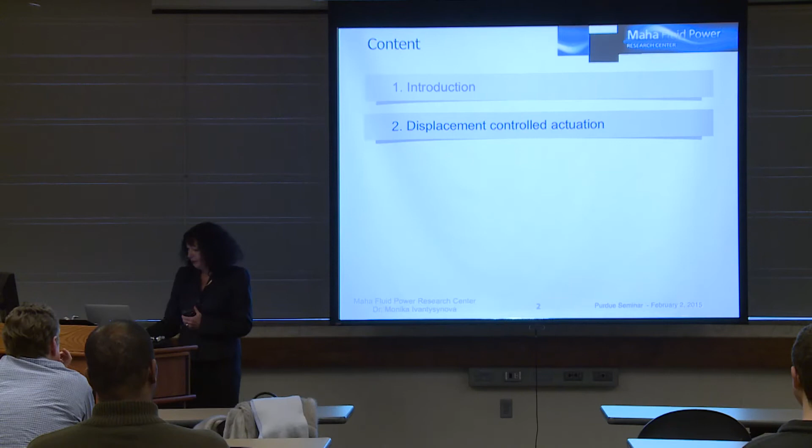I entitled this presentation 'From Gutenberg to Cloud Printing and From Bramah to Question Mark.' I will use my introduction to explain why I chose this title. Then I will talk about one of our new technologies, displacement controlled actuation, and I will explain what that means and what we have done in this field.

Then I will talk about hydraulic hybrid systems - we have researched and are researching this topic. The third area of research I would like to share with you deals with pump and motor design, and where the biggest secret is - the secret of the fluid film - and I will talk about that. I'll finish my presentation, hopefully in time, by sharing some of my future plans with you.

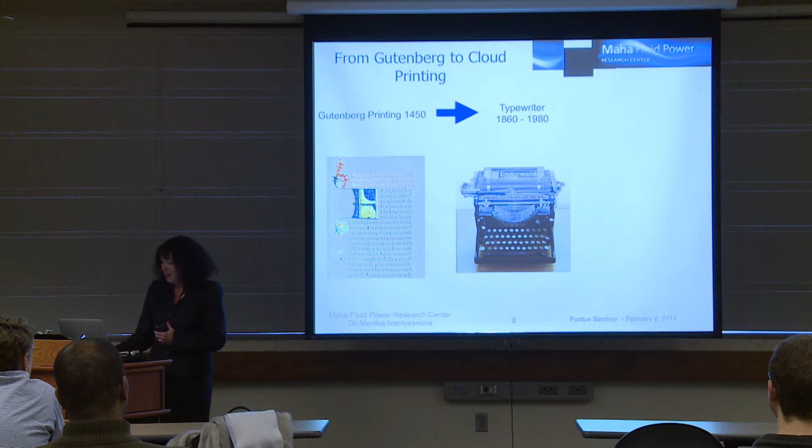If we look, Gutenberg invented print technology in 1450 - this is long ago. But I don't want to talk about Gutenberg; I want to talk about something we all know, the typewriter, the electric typewriter - look at this, it's just 120 years of history. And where we are today: cloud printing - this is my invention, but you know what I mean. So we now use other devices to make our papers, and what that means is the technology of the last century had to disappear. There are no electric typewriter manufacturers anymore.

So where does this bring us in my area of research? Bramah invented the hydraulic press, and that was the starting point of hydraulics going into industrial use, in 1795.

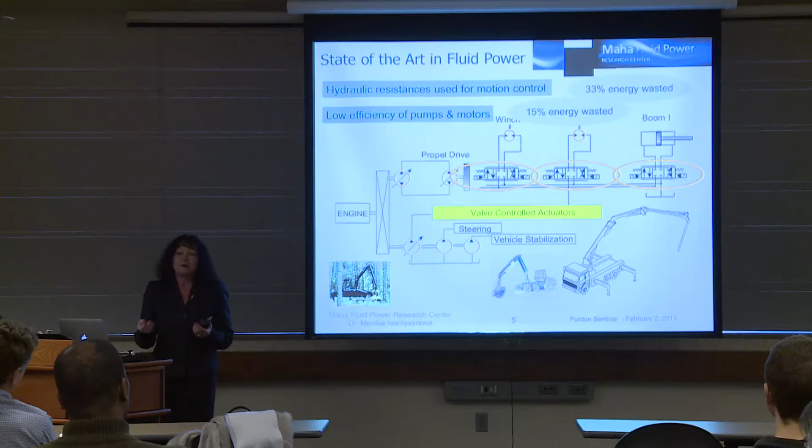There are pumps and motors in each hydraulic system, which also are of low efficiency. But to invest in higher efficiency of pumps and motors is more or less not a thing you should do unless you change the architecture. Once you keep those valves, the investment in better pumps and motors is meaningless. You will not get the payback.

And there is something more. Human control should be replaced by automatic control so we can do effective engine management. Hydraulic systems are basically energy transfer systems, so we need always a prime source of energy. And in most of the cases used in the transportation sector, the primary source of energy is a combustion engine. So we want to make the entire system very effective, and that's only possible with complete new architectures.

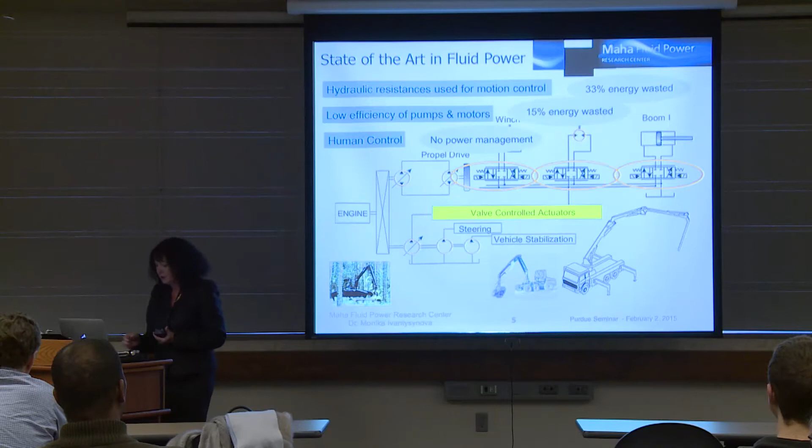So to conclude this, throttling valves are my typewriters. And second, pumps and motors are still designed in a very inefficient trial and error process. In the computer age, we would like to come to computer-based design, and that would allow us to improve efficiency of pumps and motors as well.

So, the major question being answered by my research, or the research of the Maha lab: how much can performance and efficiency be improved through the introduction of new system architectures, more advanced and new components, and new control algorithms?

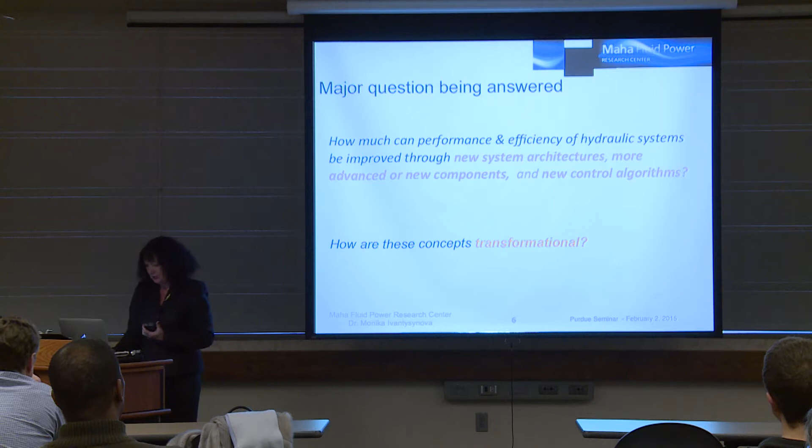And the question is, is this transformational? You will see, yes, and that's one of the reasons it's so new that a lot of industry does not really want to make this step, even if it would make a lot of sense.

So, what's the Maha system approach? We want to achieve major energy savings through throttleless actuator technology. So, removing those valves and using direct pump and motor control for every actuator.

Very early on, we started with a pump-controlled rotary actuator, pump control or displacement control, and I might use later on in this talk 'DC', meaning we use the pumps and motors.

So there are two effects of that. Not only do we avoid throttling and get better energy efficiency, but we can also have energy recovery. Because in all situations where we have aiding loads, our pump will automatically run as a motor, and we can use this potential or kinetic energy back. So energy recovery without adding any components. Very nice thing, no throttling. That is what we want to do.

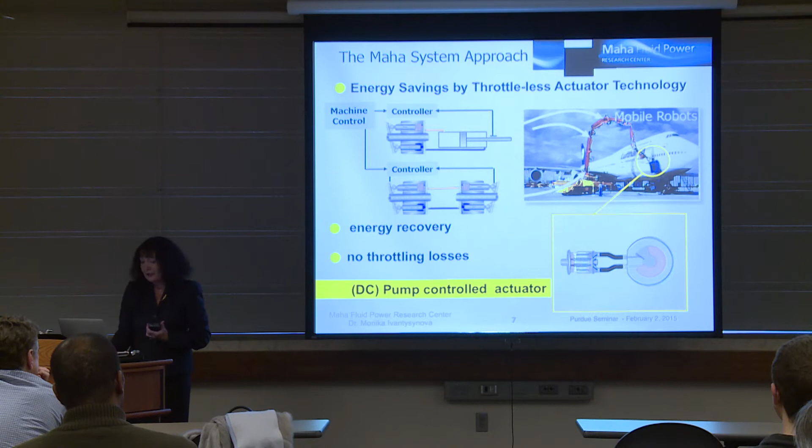But unfortunately, this changes completely the architecture of today's hydraulic systems, because suddenly now each actuator needs its own pump. And this is something like, oh my God, so many pumps. This question is very often asked by industry. But I think it makes all sense. So we want to use more pumps, but we do not want to use throttling valves.

I want to explain an invention we made in 1998. We did not patent it, we published it directly. This pump control concept is easy to use for rotary units, rotary motors, or double rod cylinders.

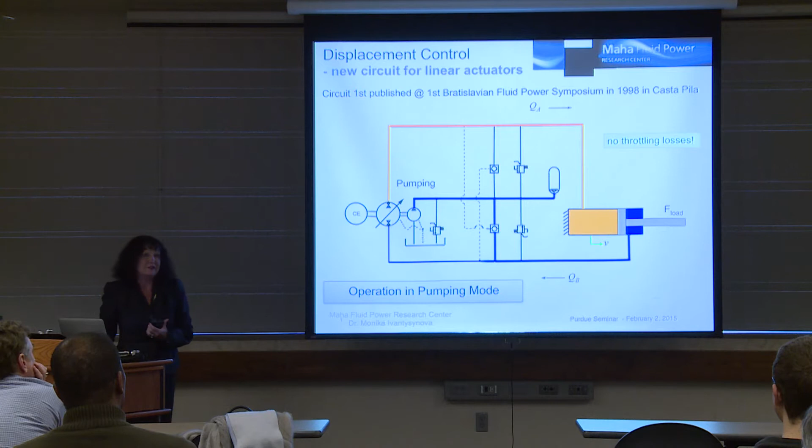But I'm showing here, you see that the cylinder on the right is a so-called single rod cylinder. So there's a problem if I use a pump with unequal flow conditions. If you see, the pump delivers flow to one side. From the other side, the cylinder is not giving as much flow back to the pump. So we need somewhere to balance this unequal flow.

And we came up with the idea to balance this on the low pressure side. So, in aiding load conditions, that's the force moving the cylinder, we can automatically have the pump running in motoring mode and giving torque back to the shaft.

Something very easy, not anymore too many variables to be controlled.

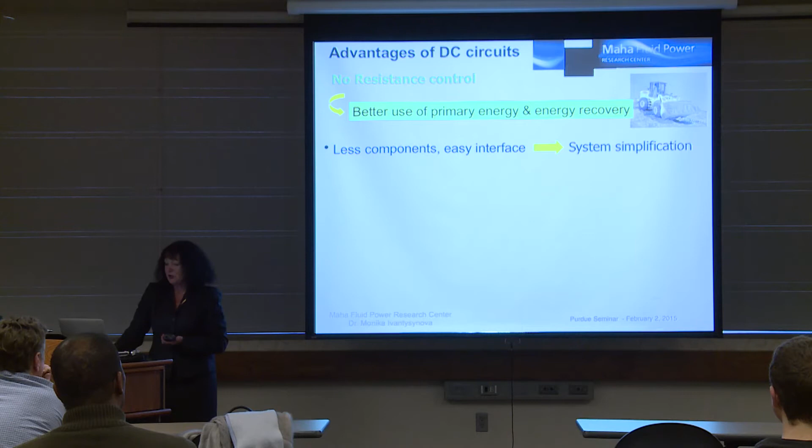So in summary, this technology has a lot of advantages. Less components, circuits look easier, so system simplification, less fuel consumption means lower operating costs, less heat is generated, we can reduce the cooler. Machine functions can be much easier realized by software, so easier to control. And from some of our prototype machines, we learned improved operator feeling and higher productivity, simply because now the operator is operating each function independent of the others.

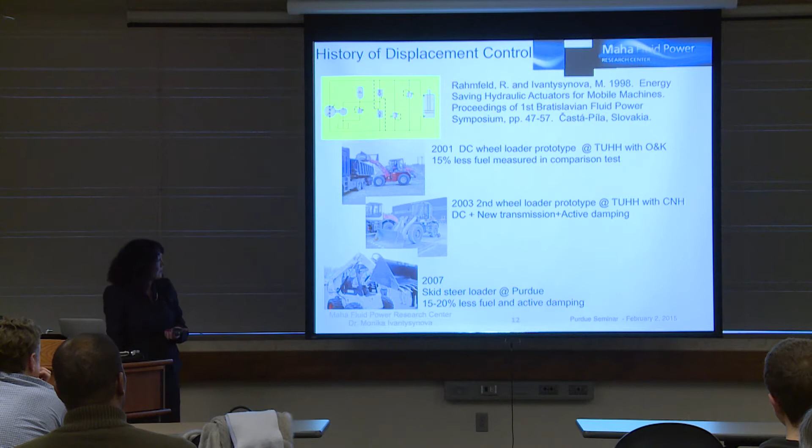So I have here some prototype machines we worked on. One more time, 1998, we published first time that solution. We built then a machine in 2001, a second one in 2003, and measured fuel, and you see the fuel savings are 15 to 20%. At Purdue 2007, we had a skid steer loader with this technology, 15 to 20%. And then with the introduction of the ERC, we finally started working on an excavator, and fuel savings of 40% were demonstrated in 2010 with that mini excavator.

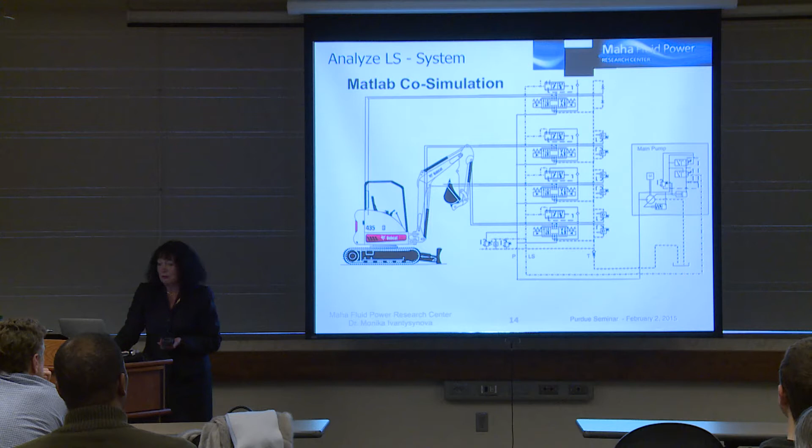Now I will talk a little more about that mini excavator, which is the test bed of the ERC. We are now a little what we're actually doing, what's the research about. Of course, we need to have models of the system, not only a model of the hydraulic system, but models of the mechanical system as well. So we run co-simulations to predict what will happen, to predict the performance of the system. We started that project in the past and predicted for a typical digging cycle that the energy of the current machine, energy consumption would be as follows.

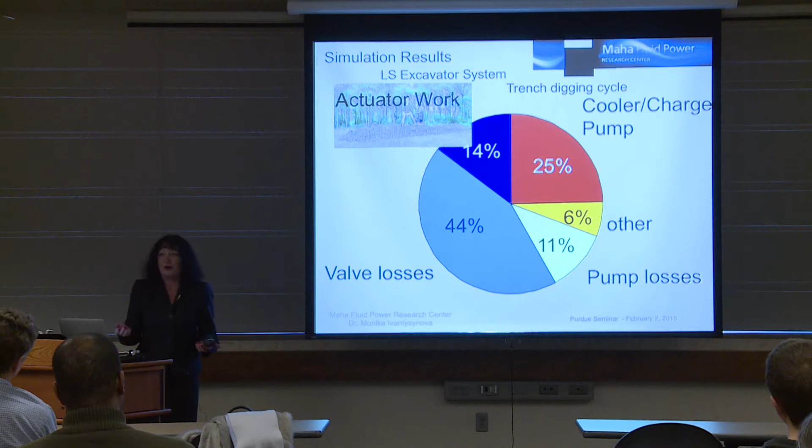And that, I think, is an eye-opener. If you see the pie chart for the typical trench digging cycle of the excavator, this is current technology, last century: 43 or 44% are lost in the valves. Then we have 25% lost in the cooler, which we have to implement because we are turning so much primary energy into heat. And then we have friction losses, pump losses, and at the end, from the energy provided on the engine shaft, only 14% is used for work. That's crazy, is that? 14%.

So that was simulation, but we instrumented a machine and put sensors on and did verify our simulation model. And then we used the simulation model for the new system we proposed.

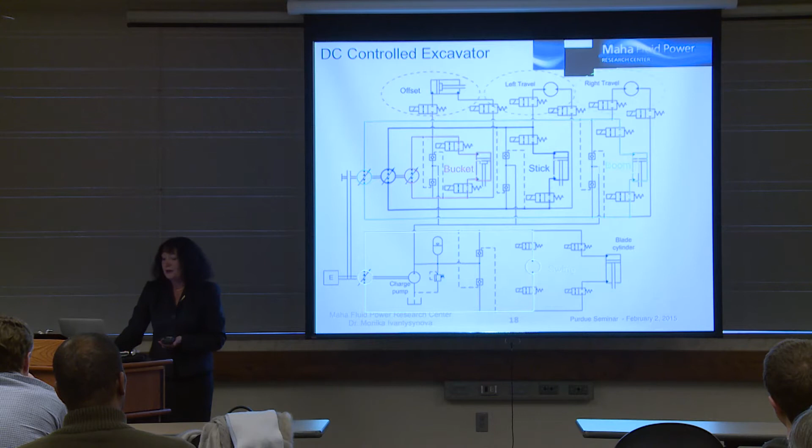I will fly through, but you see now each of the excavator systems, the bucket, stick, the boom, have their own pump. The swing drive has its own pump, and we share these with some other functions which are not always used. Now that's the new system architecture, and let me share with you how this system now is using energy: 39% less energy is consumed for the same cycle. This is the pie chart. I do not have them next to each other, but this pie is much smaller, 39% smaller.

And now how is the energy here distributed? The charge pump losses are now 23% because the entire energy is not so much. We have cylinder losses. We have now 39% pump losses because many more pumps are there. Coming to that, it makes sense to look at pumps and to improve their efficiency. And now 25% is actuator work. We improved. But if we would improve pump efficiency, we could do even more work for the actuator.

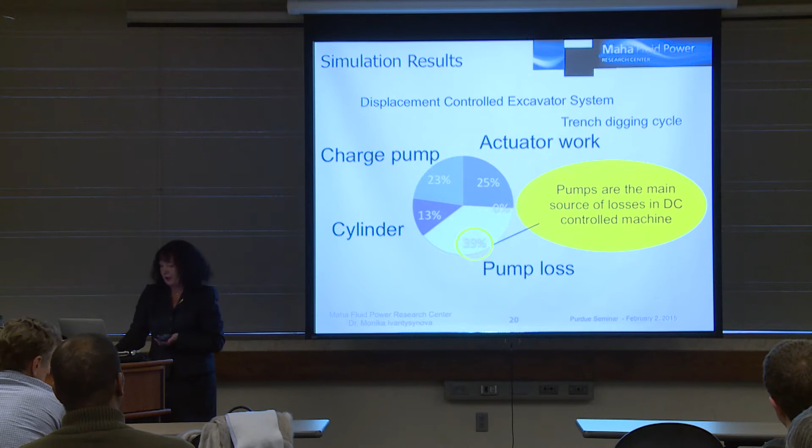So this machine was borrowed by Caterpillar in 2010, and they did a side-by-side test with a standard machine and this Bobcat Purdue modified technology. And the measurement results are here. They tried to do the same work, same soil loaded, and the fuel consumed is nearly 30% less for our prototype machine. And the cycle time was faster, which brings us to another table where you see how Caterpillar is introducing an efficiency term in terms of ton soil removed per liter fuel burned. You see the efficiency improvement of that machine is nearly 70%, 69%.

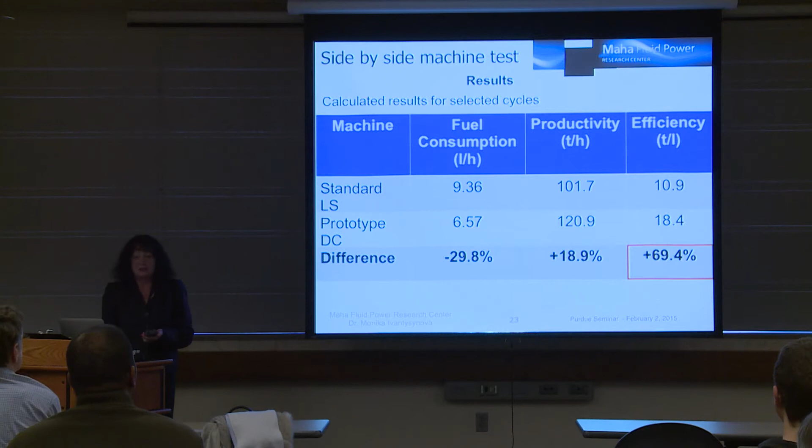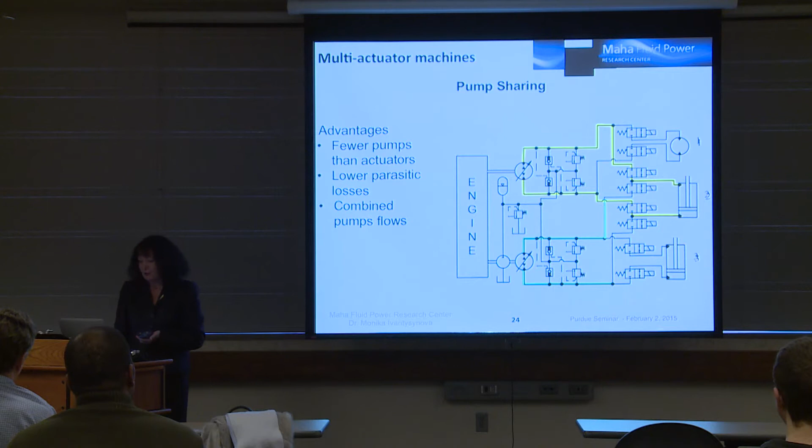Now we went ahead because this seems to be a problem that so many pumps need to be introduced. So we worked on pump sharing for all those actuators which do not work simultaneously. Can we bring in switching valves and can we then switch different pumps to different actuators? Also during machine operation, of course, without giving a hard feeling to the operator. And we patented this principle. The patent was issued in June 2012. We have in between implemented it on our excavator.

Last year I was very lucky that we could first time present a displacement controlled steer-by-wire system, so also pump control used for steering. This system was implemented on a wheel loader, which makes it the world's first hydraulic steer-by-wire system in this way.

Not only do we reduce fuel consumption, but the system applied on steering has other advantages: energy efficiency, yes, but also variable steering ratio, so it's more convenient to steer. It's easy to implement dependent on vehicle speed, and also variable steering effort.

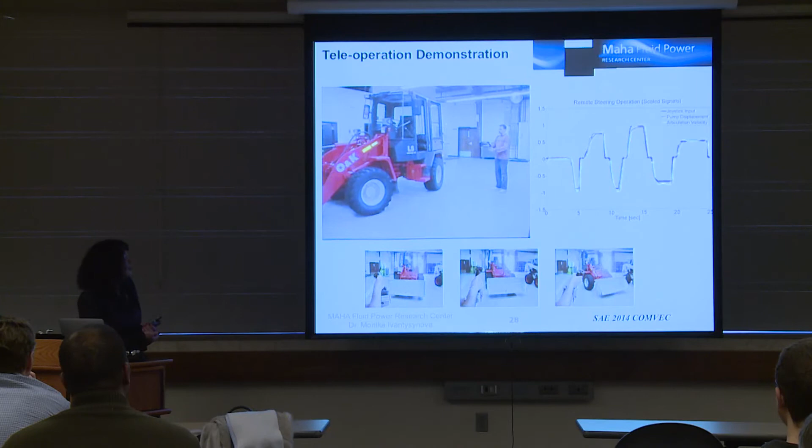And we demonstrated also autonomous operation. And if it works, I have here a video. You see the wheel loader in the Maha lab operated autonomously. So that's something a steer-by-wire system offers.

So now I want to switch to the next topic: hybrid systems, hybrid systems on powertrains. You've all heard a lot about electric hybrids because that is everywhere. So what's the motivation?

At the moment fuel prices drop, but we will see that they will increase again. And by the way, it's not just the price. I think we engineers should work on not wasting energy. We should be careful and use our energy the right way.

69% of US petroleum consumption goes to the transportation sector. And in the transportation sector, there are many areas where we currently still waste a lot of energy due to very inefficient systems. So fuel savings through hybrids, in general.

So of course we want to have a kind of regenerative braking, reuse the brake energy. We want engine management to be effective, an efficient transmission concept, and of course efficient, high, and light components.

Now all these factors, we have an answer in hydraulic systems. The hydraulic hybrid is the counterpart to the electric hybrid, and can do some of the things just better, but most importantly, much cheaper than the electric hybrid.

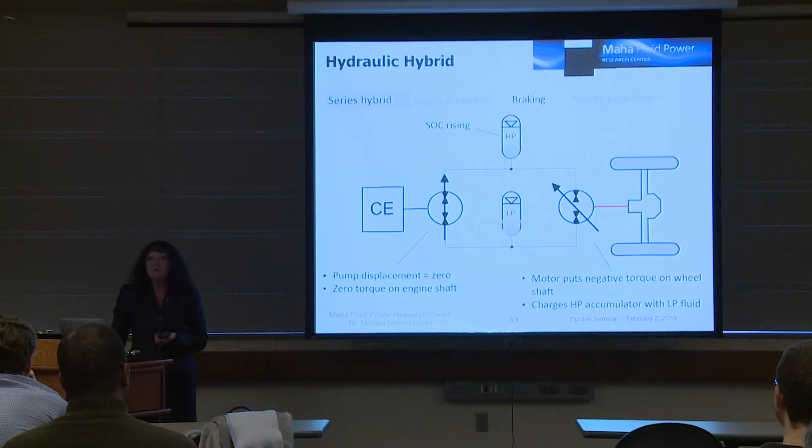Now, in case we want to brake, our motor will run as a pump, take fluid from the low pressure accumulator and pump it into the high pressure accumulator. That process is very different from the electric hybrid, where during a braking maneuver you basically cannot charge the battery so quickly. But we can charge our accumulator very quickly and store the brake energy in it.

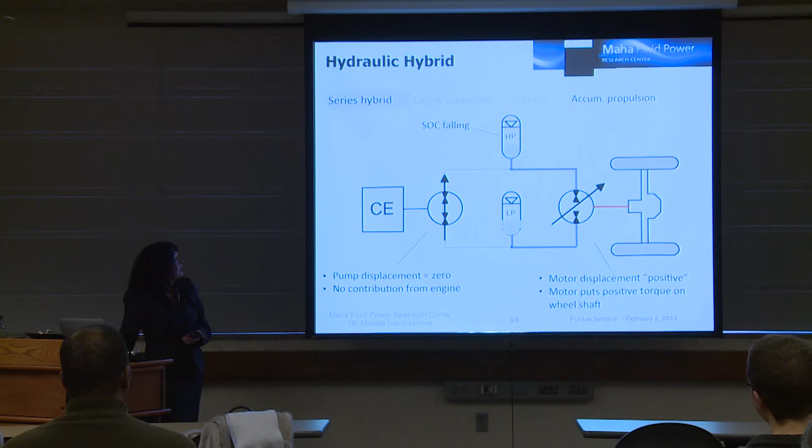And then what we can do is reuse it during propulsion. So if we accelerate our vehicle, we will use the stored accumulator power to propel the vehicle without using engine power. So what are our research tools and what are past projects?

Let me talk a little about this. Likewise, we use a lot of models in our system for displacement control, as I just talked about. Also in the powertrain and hydraulic hybrid area, we strongly use MATLAB Simulink and models. We've built libraries for very different powertrains where we have models for engines and empirical models for our pumps and motors, so that we consider the real loss behavior of those components of a powertrain.

Now, that's not the only tool. We have also used—and I'm not 100% sure if we are one of the first, but maybe one of the first groups—who have used dynamic programming, a technology used for comparing performance of controllers for sizing.

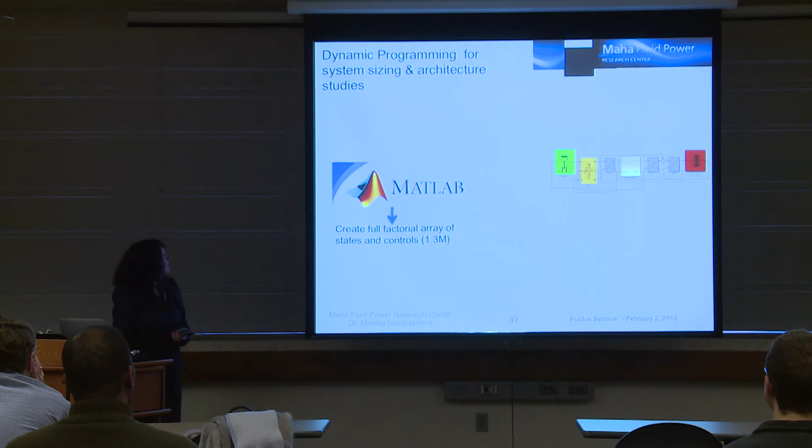Because we found that sizing in a hydraulic hybrid transmission is much more complicated, and when you size it just statically, you might not come up with the best solution. So we went ahead, and I'm thankful to my researchers who came up with this idea to use dynamic programming for dynamic sizing of hydraulic hybrid transmissions.

And in order to do this, we had to use our parallel computing cluster. Here's an example: just to run 2,000 designs would take 5 years, but running with our own computer cluster, we could do the same thing in 5 days. I think this is impressive, and I would like to thank my students for creating all this. This is all the work of my students here, what I'm presenting.

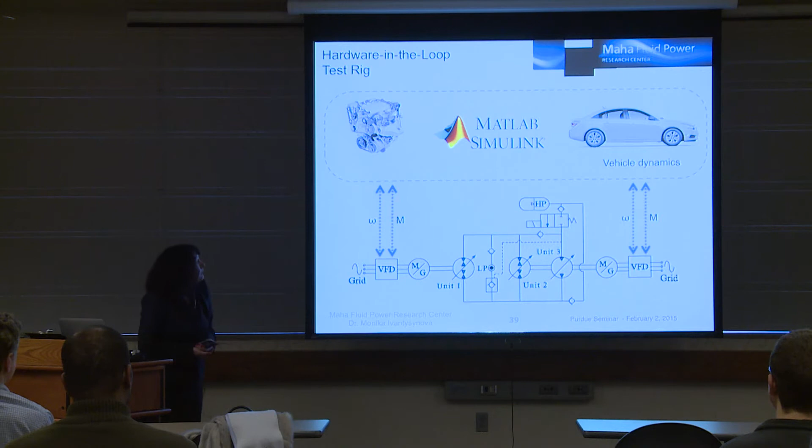So that's our cluster, and here you see another research tool. We have two very strong hardware-in-the-loop test rigs for testing transmissions. One uses electric machines to simulate the engine, and another electric machine to simulate the vehicle dynamics, the vehicle itself. In the hardware in the middle is whatever transmission we might want to test, and whatever control concepts for this hybrid transmission we want to test. This is very powerful and has led to a lot of nice research results in the past.

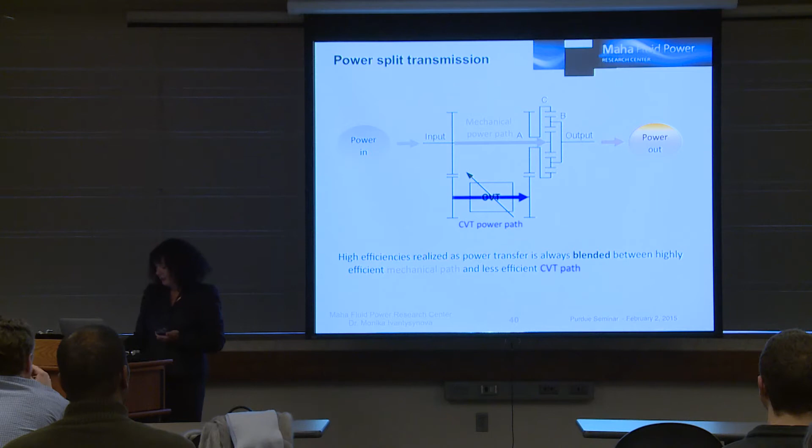We have also done research on power split transmissions. Power split transmissions first made it onto the market in a large amount in agricultural tractors, and I was involved more than maybe 15 years back with this technology when it came first to the tractors. That gave me the opportunity to think about whether this architecture involving a planetary gear set plus a continuously variable transmission in parallel could be used also for a hybrid. And the answer is yes.

We patented this solution here at Purdue. You see there's even 2 patents issued. A power split hybrid—this is, to me, the transmission of the future. This is the transmission we should use in all kinds of vehicles if we care about efficiency. Due to the parallel arrangement of a mechanical shaft from the engine to the wheels and the continuously variable transmission, we can achieve very, very efficient transmission concepts and effective engine management.

So what I want to share in the next few minutes is some work we had to do on the side while taking this power split hybrid from an idea on paper to a prototype tested in the lab. But because this work was very confidential and done with industry, in order to publish in parallel, we worked on the hydraulic version of the Toyota Prius.

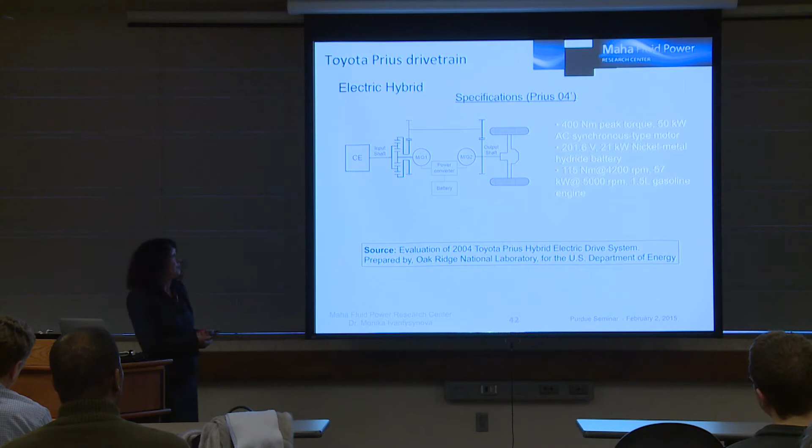Here I'm showing the powertrain of the electric Toyota Prius, like it is implemented in the car. I'm flying in the parameters, but we don't have time to go into these details. But you see we have a planetary gear train—I don't know, can you see my mouse? No, sorry, and I didn't bring a laser pointer, very bad. So that planetary gear train, the electric motor, the electric generator, both are here.

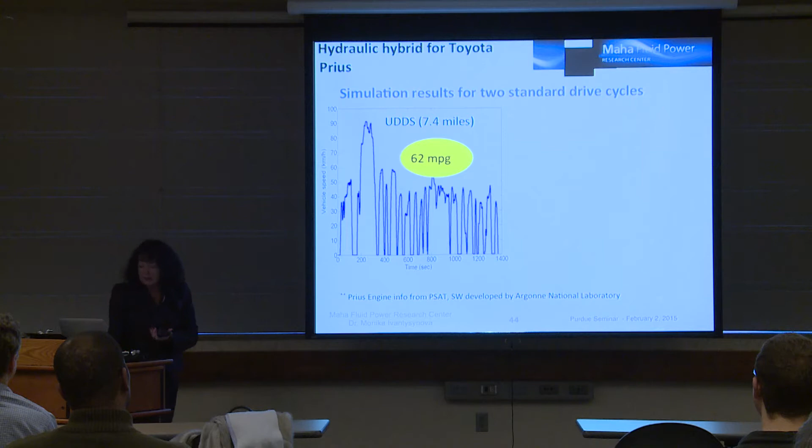Now I want to share some results. We simulated drive cycles. The UDDS is a very standard drive cycle, and we achieved with our hydraulic version 62 miles per gallon. And on a highway cycle, we achieved 60 miles per gallon in simulation first. Now I will share a comparison between our development and what you can find on the Toyota website for the Toyota Prius. Our hydraulic solution, not only is it much cheaper, it's 33% better on the highway and 30% better in the city.

So that, I think, are amazing results, if you consider that this was done by my students just on the side, while we were working on a much larger hybrid transmission together with industry.

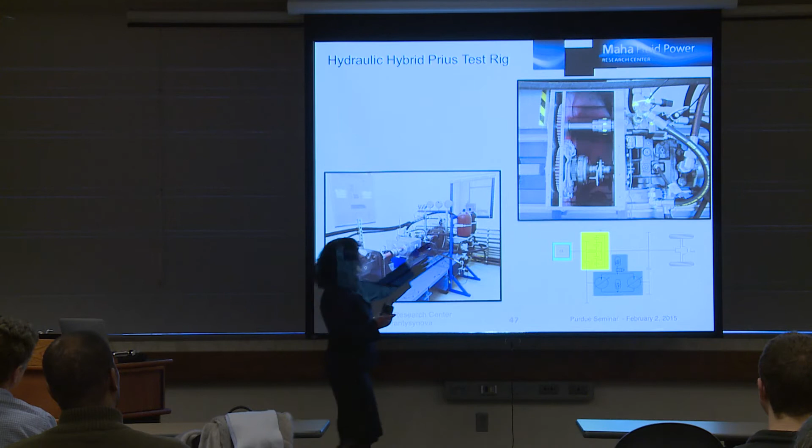So I showed here the Prius. We realized this concept also on a test rig, though I would say that is, of course, not integrated. You see the original Prius planetary gear train and then the pump and motor added to our powertrain test rig. And these are the results we achieved on the test rig.

And now they went into production. This is the first time in Parker's 100-year history that they did not acquire a company and buy a product, but instead built this on our development, and now have a division selling this concept.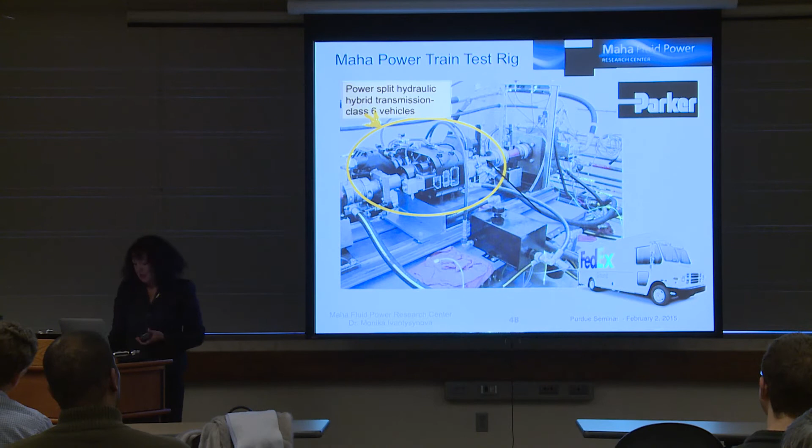Current research in this area - and I'm very proud to share another very good idea. One of my students, who is here, came up with the idea of a so-called blended hybrid. We decided not to patent it, but published this in 2012 at a conference in Russia. Now, what is this about?

With a few elements which are not very costly, we can make a hydraulic hybrid operate even better. So we have 2 motors, 1 pump, and that allows us so-called hydrostatic driving. The accumulator is not part of the system, which allows us to go below the accumulator pressure, and the lower the pressure in the system, the higher the efficiency could be.

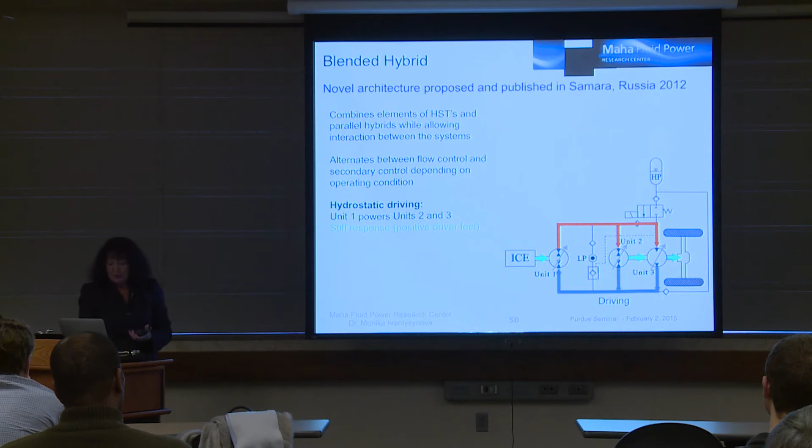But if we brake, our motors will work as a pump, and we store the energy like in any hydraulic hybrid in the accumulator, and the accumulator pressure goes up, and we have it stored.

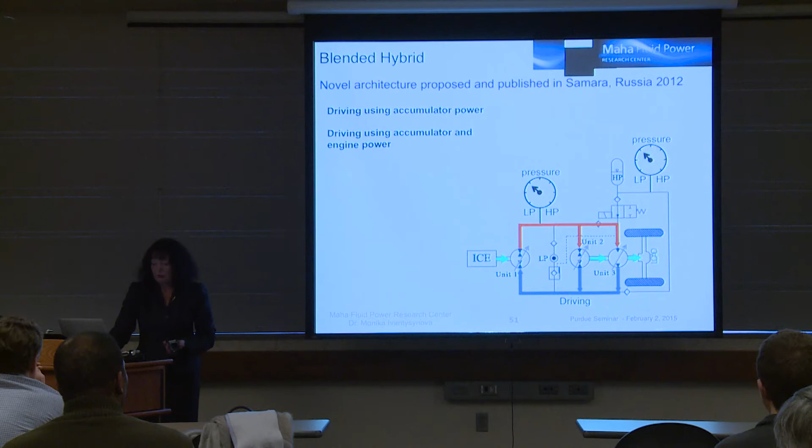Then, if we come to a standstill or lower velocity and want to propel the vehicle again, we can use the accumulator power to propel our vehicle. So this has certain advantages, and we are going further to implement this in a car. I will show you at the end what our plans are.

Now, I talked about power split. This blended hybrid can also be part of a power split, involving a mechanical gear train - a planetary gear train - together with the hydraulic blended hybrid, which improves efficiency further. Of course, it's more complex and therefore also more expensive.

Now, there is something we're working on which combines the two technologies I just explained: displacement controlled actuation and hybrid transmissions. There are a lot of working machines which have working cycles. They involve driving, and mostly these are heavy machines, so there's a lot of kinetic energy which could be gained back if we implement hybrids in those vehicles.

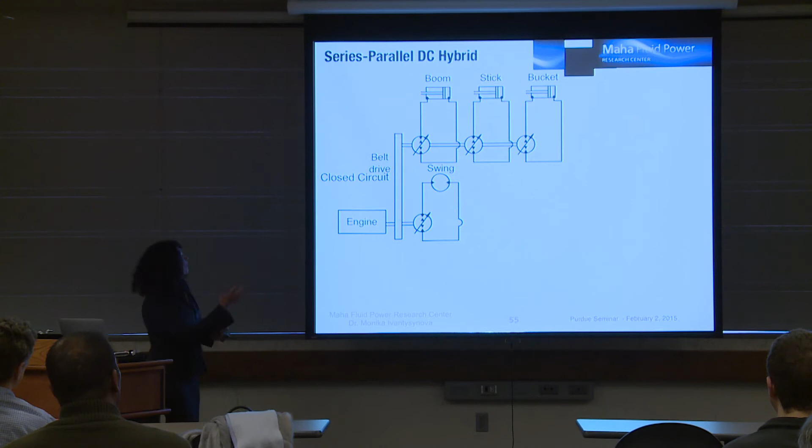I will share with you some work we did on a reach stacker - this is the machine here stacking containers in a harbor in a few minutes. But before going there, recall our test bed, the mini excavator, which roughly has this circuit - see, for each main actuator, one pump.

And then that was the result: Caterpillar measured 40% fuel savings, if you remember. But we went further and replaced the swing drive with a hybrid version. What this allows now is we can store the brake energy of the cabin swing.

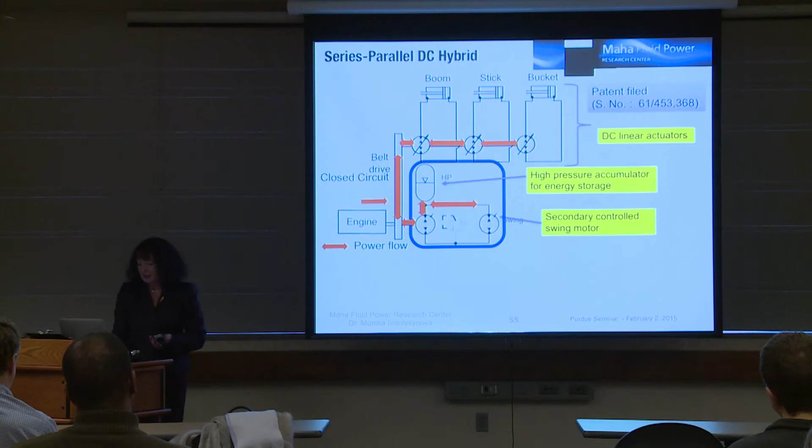Now, for the mini excavator, the rated engine power was 37 kilowatt. But that doesn't matter, a larger excavator would need more. If we bring in a hybrid, meaning storing brake energy, then suddenly we have this stored energy available, and that allows us to downsize the engine by half.

What does that bring? Remember, I said 40% fuel savings - we can now achieve 51% fuel savings. At least this is what our simulation has shown. We did not downsize the engine of the actual excavator because that's a lot of work, so I don't have real measurements, but I trust our simulation that it would be around about this.

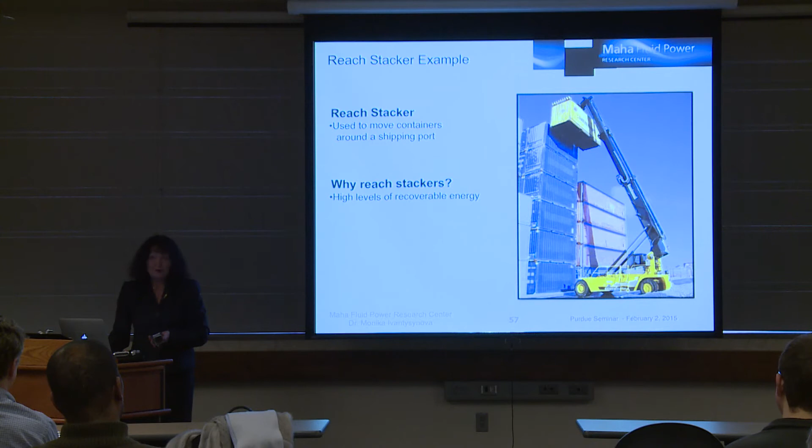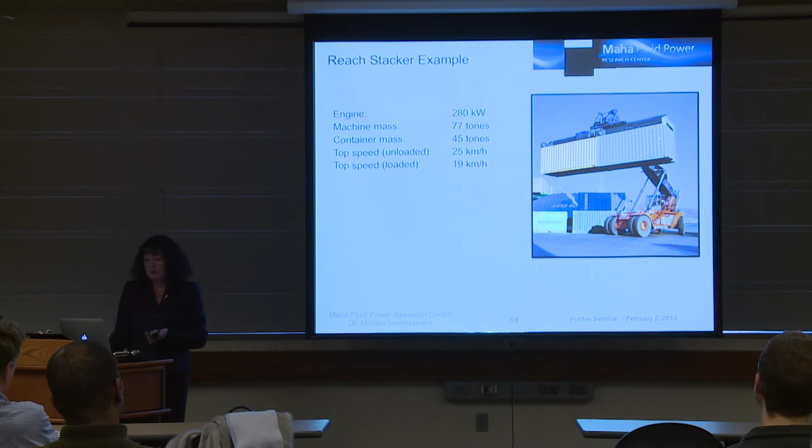Now, a few minutes about the reach stacker. The reach stacker is a machine which involves heavy loads first of all, but also a lot of short driving and braking. Being a heavy machine, a lot of energy can be recovered. To give you an example of how big the engine is: 280 kilowatt, the entire machine 77 tons, the container mass 45 tons, top speed 25 kilometers per hour. Just to get an idea - and that's a typical drive cycle.

Now, if we look at what is actually available in energy when we stack these containers - potential energy is 5.1 megajoules. That's a lot, which can be recovered if we have a hybrid, or displacement control - I should say rather displacement control in this case. And the brake or kinetic energy, unloaded and loaded, is 1.9 megajoules.

That's another large amount of energy. Now, the hydraulic system currently implemented in those machines is last century. We have valve-controlled systems, we have power shift transmissions.

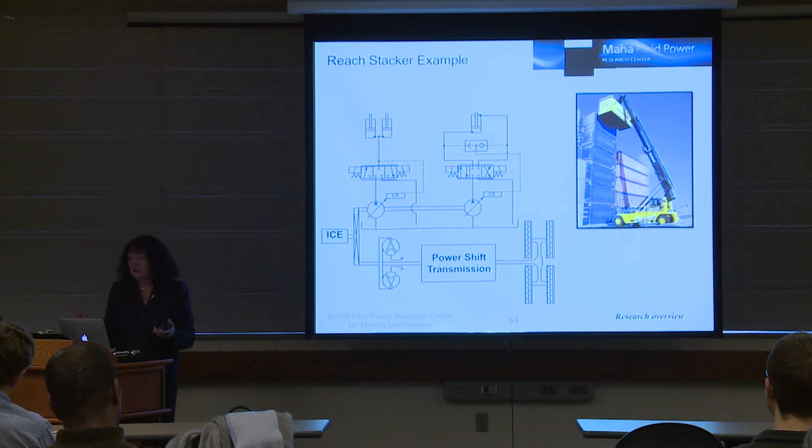None of these subsystems allows recovery of energy. So we replaced the boom circuit, the valve-controlled one, with our displacement-controlled version, which now allows, when we lower the boom, recovery of this available potential energy. And I'm still working here with this animation of Mike, which is not working so good on my computer. We further replaced the power shift transmission with a power split.

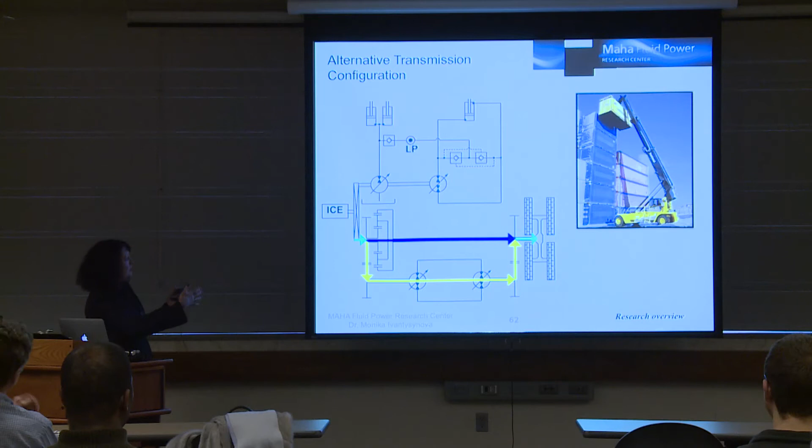The names are similar, but very different in efficiency and operation. So again, we have a planetary gear train with our hydrostatic transmission, and on top we added the DC actuation, which I talked about at the beginning of my talk, then the power split, a very efficient transmission concept. And here we added a hybrid, another storage device with a pump. This architecture worked, or seemed to work best, in order to get the highest machine efficiency.

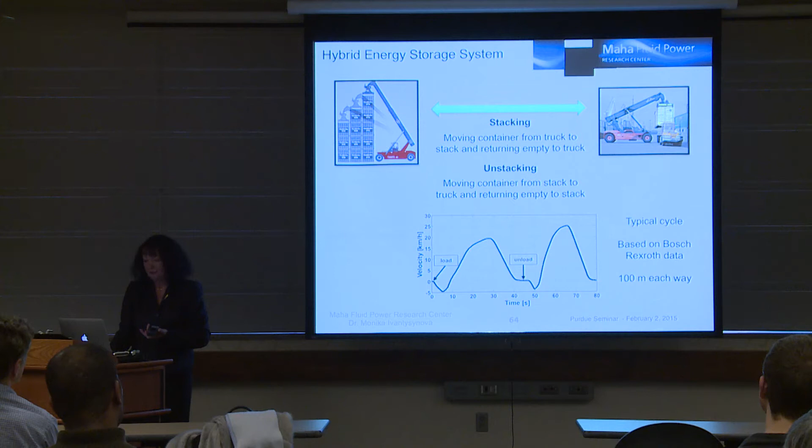I will show you some simulation results for a typical stacking and unstacking cycle of this machine. On average, the results are 47.9% average reduction while unstacking, and while stacking 30%. So on average, 38%. Now you need to see, this is a huge machine consuming a huge amount of energy, so that, I think, is a very amazing result.

So now with that, I have 20 more minutes, and I want to come to my third area of research: new design methodologies for pumps and motors. Remember that in current systems, they have all been designed on a very, very expensive trial and error basis, and that brought us to a technology status that you cannot go beyond.

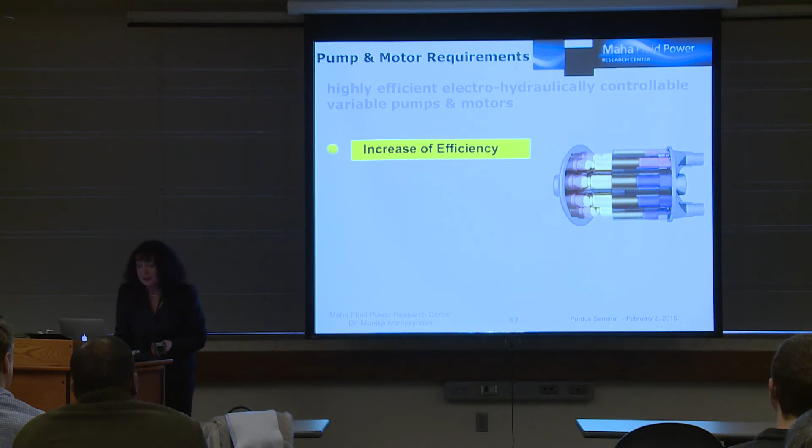But with computer-based design, I think we can make a big difference. So I will talk about the secret of the fluid film here. What do we want to do? We want to design pumps which have better efficiency, smart pumps with advanced pump controls, which are suitable for the displacement control circuits I proposed, increase of power density, and lower noise emission.

I cannot talk about all of this, but will concentrate on the computational effort here. So what's the future in pump design? Do we need new principles? My answer is we want to go rather an evolutionary versus a revolutionary development.

We want to improve current designs by understanding what are actually the physical effects which work in those pumps, which have been designed like a black box. It works, but why does it? So we want to get this complete understanding of the physics.

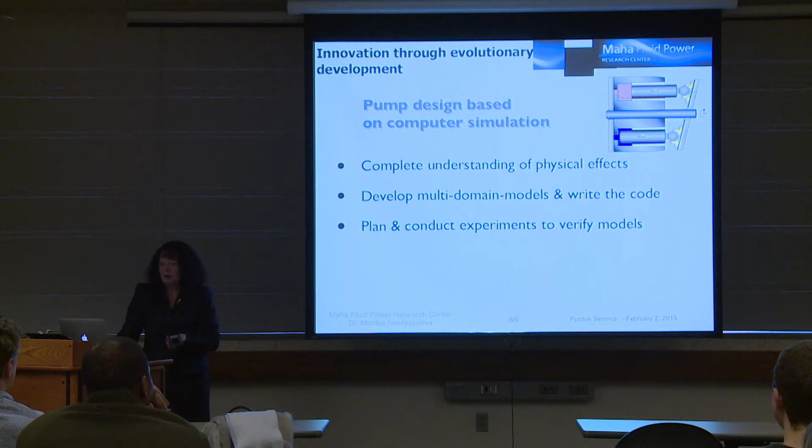We have built, and there's a need to build, multi-domain models, write code, to understand, to verify those models with a lot of different experiments, and I will share some of them with you. And of course, to improve the models, to cover the main effects better, and to develop finally code which can be used by industry. So what's actually the most critical element?

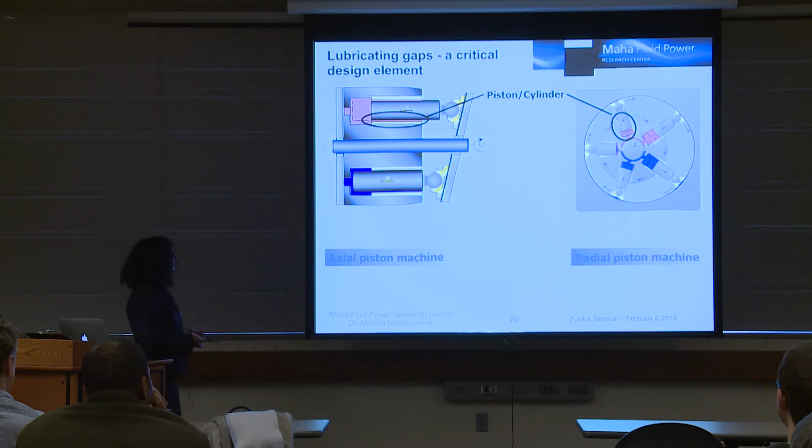The lubricating film, that is the secret. I said there are lubricating gaps, and I will show you this on two different designs. On the left, the axial piston machine, on the right, the radial piston machine. Both machines are heavily used in current hydraulic systems, and they have in common the piston-cylinder interface, a slipper interface, and the cylinder block valve plate or control journal interface.

Now, what's so complicated about that? These interfaces have two functions to fulfill simultaneously: sealing and bearing. In mechanical engineering, we have seals and we have bearings, but these elements, unfortunately, have to do both functions as good as possible. However, usually it's controversial: you have a good seal, that's a bad bearing, and vice versa.

Now how do we tackle this? We need to understand what the fluid film does there. It determines friction, leakage, load carrying ability. But the biggest unknown is how this film is actually created and how it gets its stability.

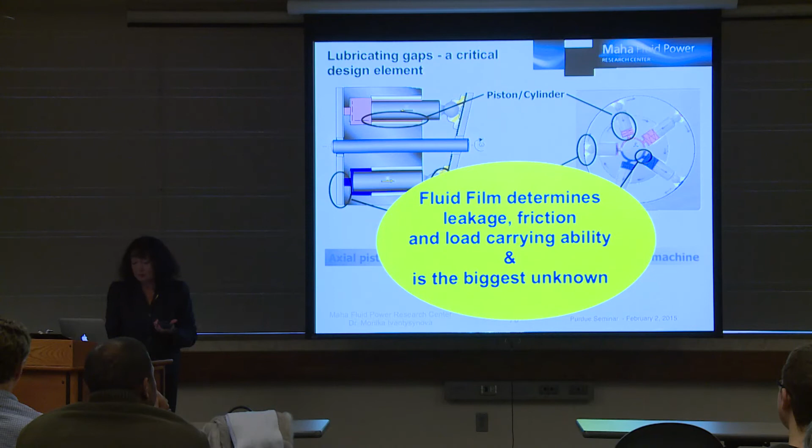So how does the fluid film get created? We know that there's machine kinematics. I'm showing here the kinematics of a moving axial piston machine. We know that there are design parameters, clearances the designer has in mind, and that plays a role. That is known, this is no surprise. But what else plays a role?

And that's the question here. We discovered many years ago, but let me start first - we know that we need to have a certain load carrying ability of the fluid film.

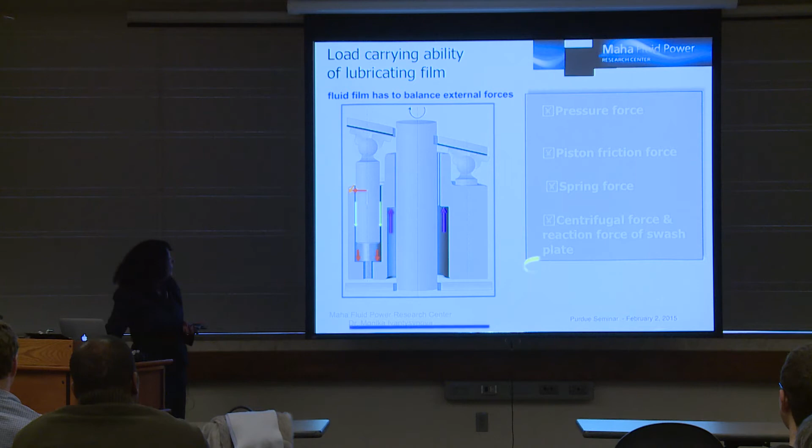If we analyze this axial piston machine, we know what forces are acting: pressure forces, friction forces, spring forces, centrifugal force, reaction force of the swash plate. These are all external forces acting on an interface, but there's a fluid film separating highly loaded parts from each other. We can get a stable film only when these external forces are balanced to avoid wear.

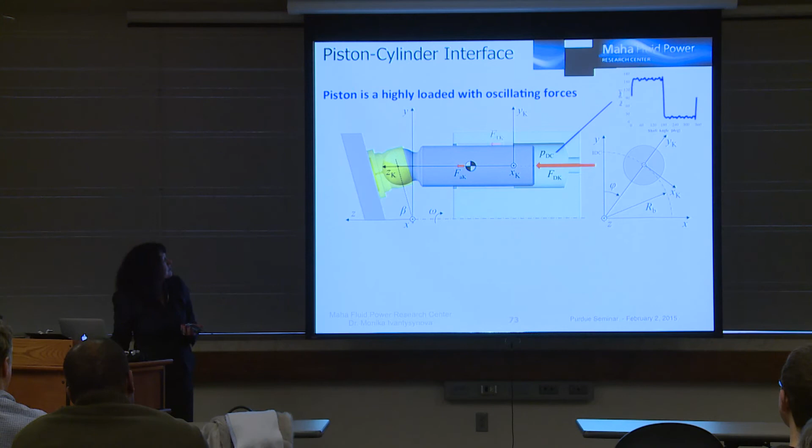So if you look a little deeper, this is the piston cylinder interface where we have again the highly external forces, pressure force, all what I mentioned already. The trick is we need to come to a point where we have a stable film, force balance between external and fluid forces also for this interface.

If you look a little closer, we know the kinematics - the piston is moving in and out, it has a rotation, spin motion. But then there's something you see on that right figure, something we discovered maybe 10 years ago, that there's a micromotion with very hard dynamic loads reacting to it, which we need somehow to model and understand because it plays an important role.

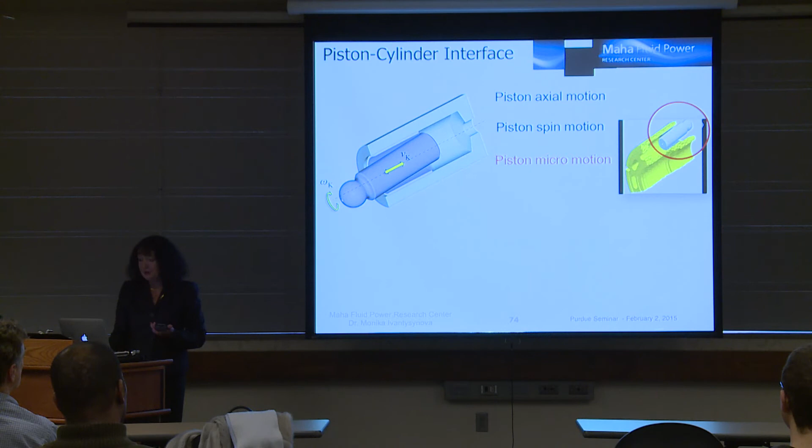So far, so good. What next? Here I'm showing one more time, this micromotion is acting also on other parts and is present and has to be understood. If you look a little at fluid mechanics, I'm showing here an equation which comes from the Navier-Stokes Reynolds equation, which is actually used to calculate the pressure in that thin film.

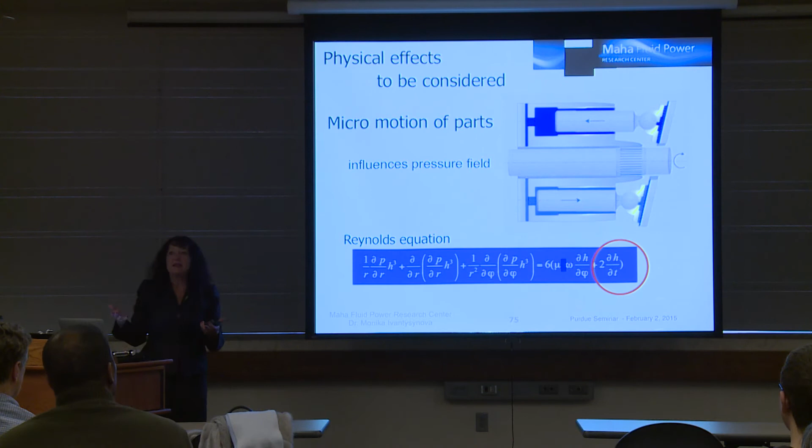Now, that equation can be more complicated - I have a very easy version here. H is the film thickness, so the derivative of the film thickness with respect to time is there, and it has an impact on pressure buildup. It has to be understood.

So if we want to have the real load carrying ability, we have to understand how this micromotion is. It's known in literature as the squeeze film effect, which contributes to load carrying ability. So we have to model that.

Suddenly, for the same machine, we got the film stabilized. So that must be an effect being present. Now, is this all? Unfortunately not.

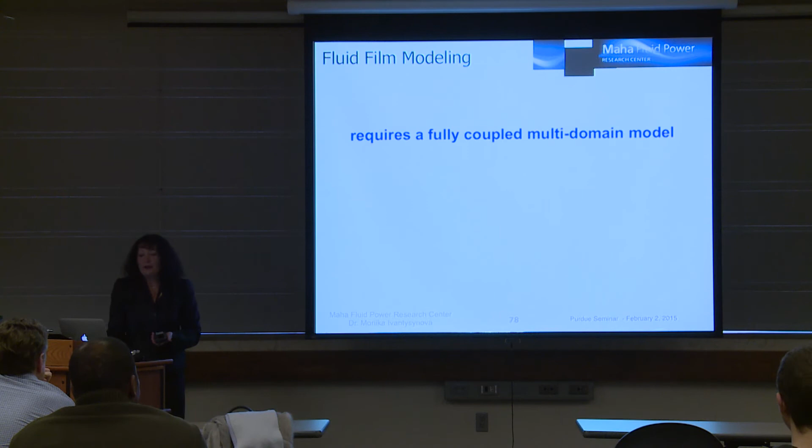So the fluid film at that point already was very clear - it needs a multi-domain model, needs to describe complex thermoelastic fluid structure interaction phenomena. So I will show you a little the structure of our model here.

So we have in the kernel of our own software a fluid mechanics model describing the gap flow. Then we need to describe the micromotion I explained. From there, we get the squeeze film effect expressed, and we can calculate this pressure distribution of the film - that fluid film of some microns, dynamic pressure.

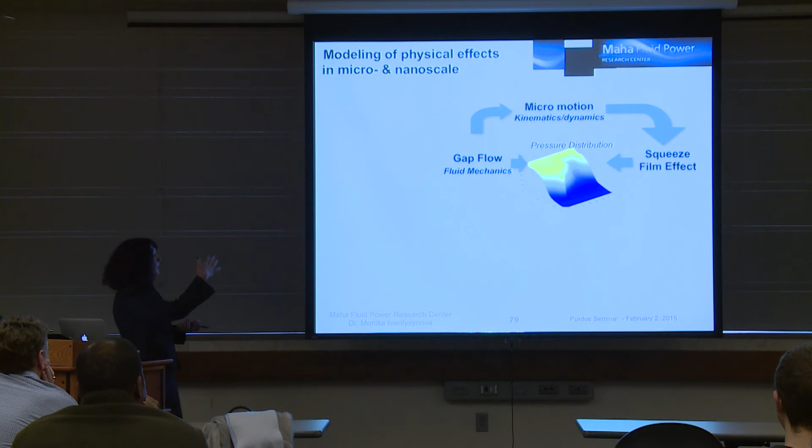What you see the change here is during the time a pump would run one shaft revolution, and then of course the process is repeating. So these dynamic pressure changes are present, and you see those spikes? They will deform the solid structure. So we need an FEM analysis to consider fluid film thickness changes locally impacting the gap flow model.

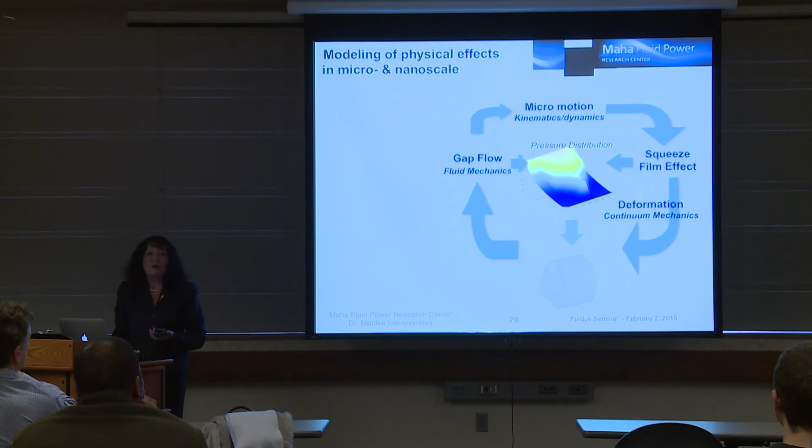Now our fluid is viscous and viscosity changes with temperature and pressure. We knew that, but we wanted to have a more precise description of our flow model. For that, we very early on already tried to include a heat transfer model - how heat is distributed in the entire machine to consider locally the correct fluid viscosity.

Now, after we arrived there, we found also - and that was relatively recently, maybe 2 years ago - that there is thermal loading on the bodies present, which is not evenly distributed and leads to additional deformation of parts, which plays a role, and we had to consider this.

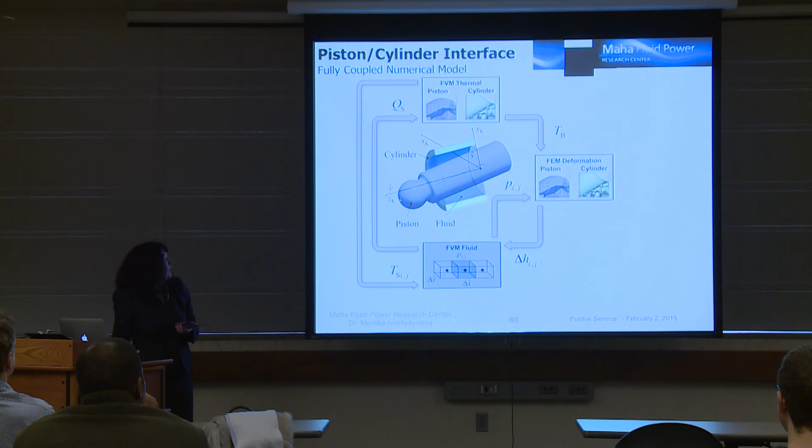I will show you some of the discoveries we made in this area. So that's one more time just the structure of our model: a finite volume model for solving our fluid mechanics equations, FEM analysis inside our code with our own FEM solver for pressure deformation of the solid parts, and then a heat transfer model calculating the distribution of heat in the solid parts of a pump, taking from there the thermal loading and considering also the deformation of parts due to temperature distribution being uneven in a unit. Once we solved all this, we discovered some very interesting things.

One topic which was around for at least 3 years without any solution: you remember that picture where everything was moving? They are moving freely around, seeming to be held and stabilized by force balances. If you ever run a finite element analysis, you know you need to constrain your parts. But the question was, how do we constrain that freely moving piston in the cylinder? We tried to constrain the part at very different places, at the axis, at the head of the piston, but everything showed different deformation. What's right, what's wrong? Finally, one of my former PhD students came up with a method he found applied in aerospace and other areas, called inertia relief. We introduced this, and now we are using it broadly for all the interfaces for constraining our freely movable parts of a pump.

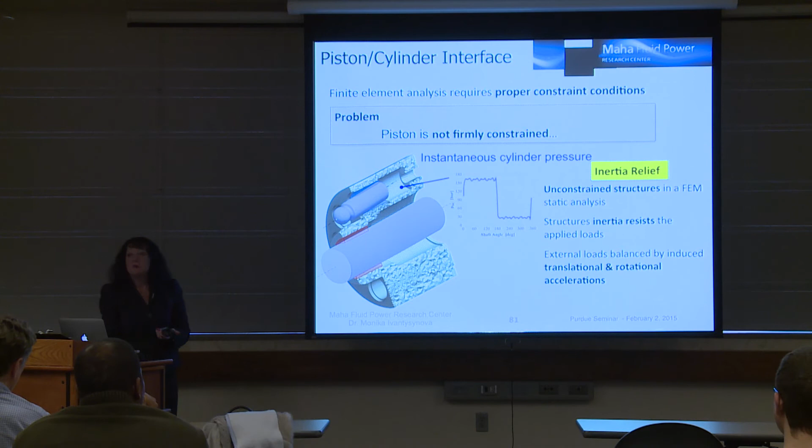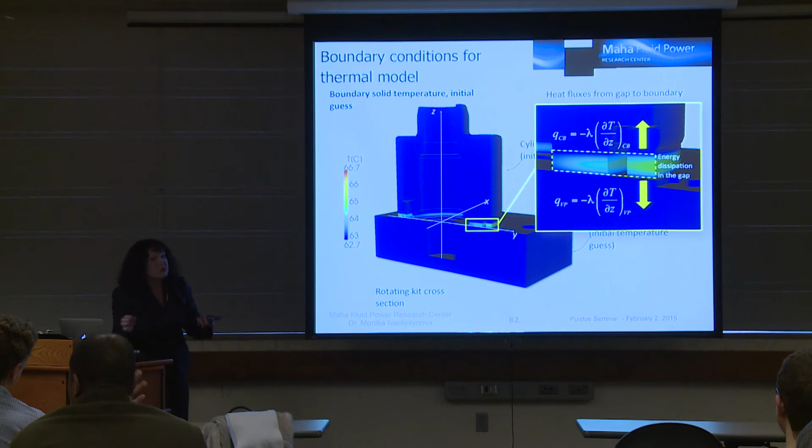So the next discovery was, how do we deal with this thermal loading? That introduced a lot of problems because heat transfer is necessary to understand and model. Boundary conditions need to be found for all those parts in order to simulate the energy dissipated in the fluid film and how it is transported outside. I will show you some examples.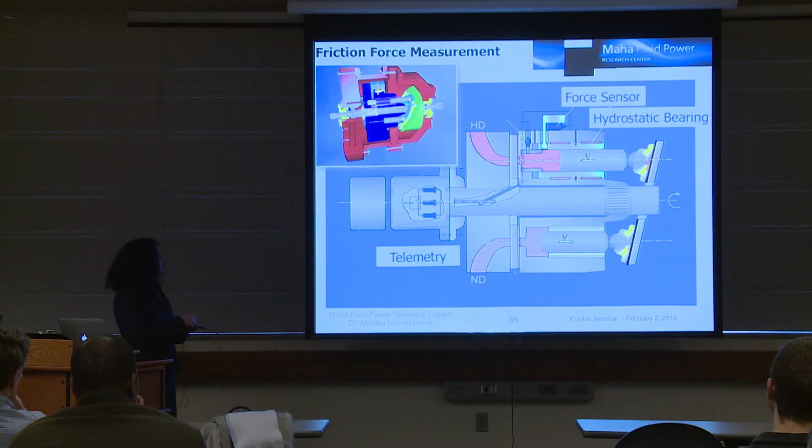So we did a lot of work validating our models step-by-step in more complex scenarios. One of the test rigs we built is shown here. We designed a pump that would solve only the problem of measuring directly the friction force between piston and cylinder. I'll show you the cross section of this pump on the top left. We have telemetry for wireless transfer of the friction force sensor signals. This gives us the friction force, which, if the film thickness is right, is a parameter our model should exactly be able to calculate. We wanted to compare this with measured data.

I'll show you on the next slide some of the results. You see the measured data in blue. The green data was what our rigid model gave us several years ago, so the friction force is off. This is friction force of a piston cylinder over one shaft revolution of the pump shown here. Finally, our fully coupled model came close to the measurements.

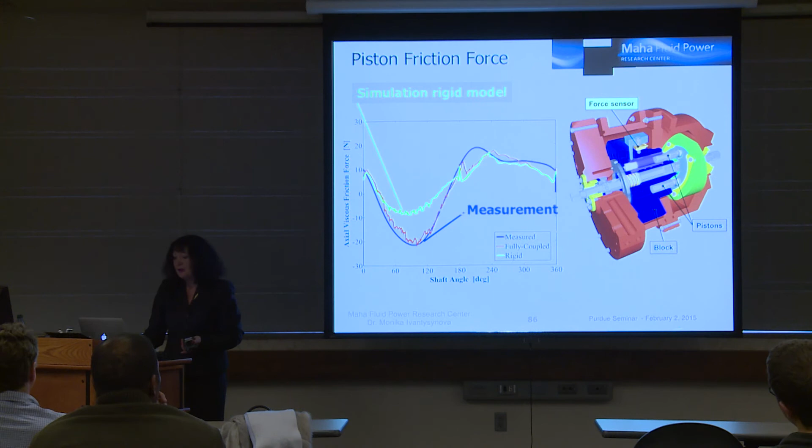That's nice to see, but there are still things to investigate, and unfortunately I don't have time to talk about all these details. But I want to share that we built another exciting test rig to confirm these local surface deformations due to pressure, which are highly dynamic, and we had doubts about whether the metal can deform so quickly. So we built a single piston pump where we were able to implement a lot of pressure sensors around that piston to measure whether the surface deforms, by measuring directly the pressure field.

We did know from simulation that this pressure field, shown on the bottom, looks completely different depending on whether the surface is rigid or the surface deforms.

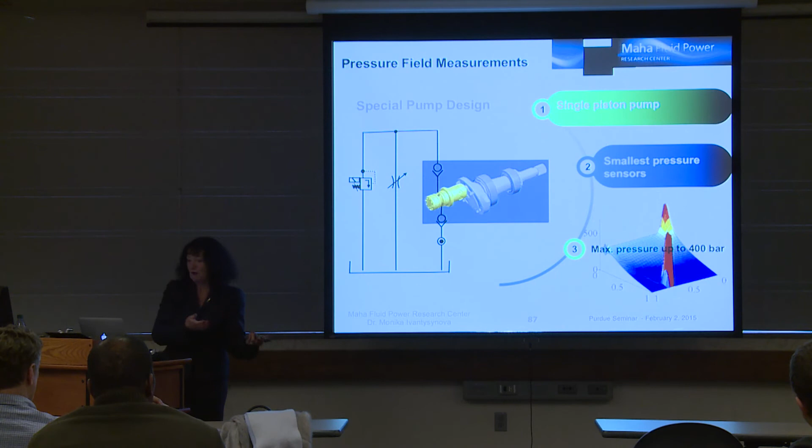Here you see that cylinder block with pressure sensors implemented, thermocouples around very close to the film, thermocouples directly at the film, and the pressure sensor 2 millimeters away from the film. We had 9 pressure sensors, the smallest we could get at the time. So we had a nice idea to make the block move around but in a fixed and controlled position.

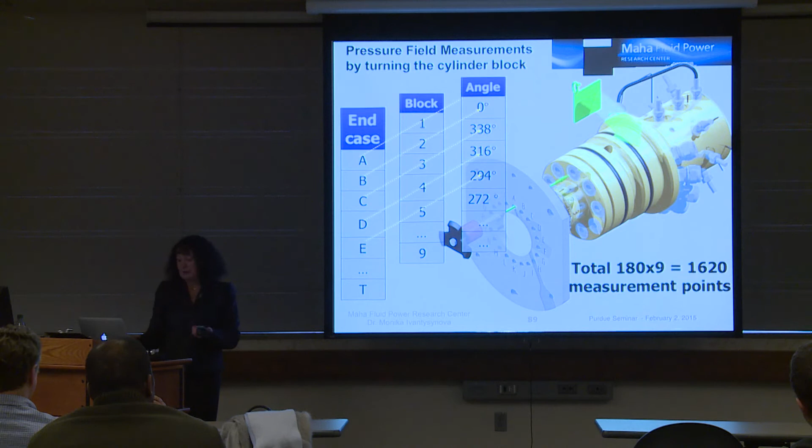By turning the block 180 times around, we could get a resolution of the measured pressure field with 1,620 points. At that time, it was more than our simulation grid.

So here you see the completed pump, and next I will show you some results of the measured pressure in that fluid film between piston and cylinder. You see the piston length here and the circumference of the piston.

So we see that film basically unwrapped, with high pressure in the displacement chamber over half, and then suction pressure goes down. Those peaks are hydrodynamic effects caused by deformation of the surface. So with that, I think we confirmed this deformation is present.

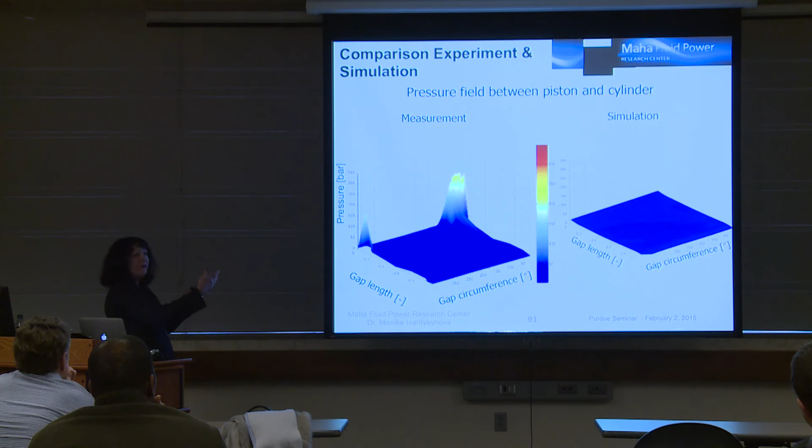Here you see again simulation versus measurement on a valve plate, and the temperature distribution again. Several years back we did a similar experiment and were not capable of measuring these hot spots. We measured these hot spots on both sides, but our simulation model was not able to see them.

I remember, and will never forget, one of my PhD students who had already finished his work told me, 'Monika, this is because our model is laminar, and perhaps there's turbulent flow, and if you modeled turbulent flow we might get these hot spots.' I told him, that's not true, Marco, there can never be turbulent flow, that must be something else. But I had no answer for what it was.

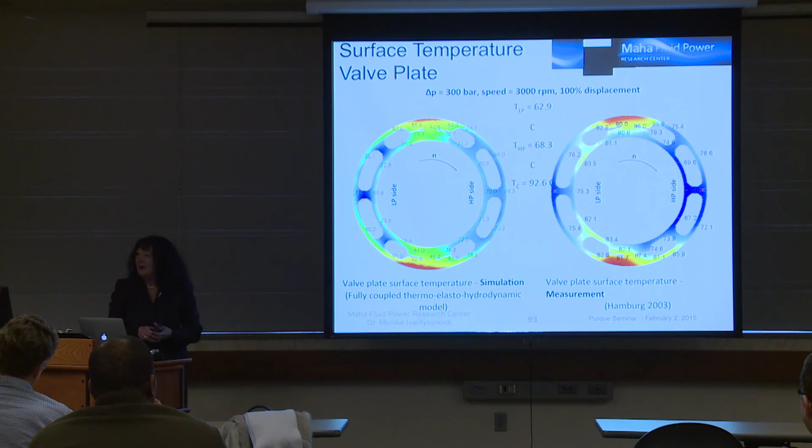But he discovered this because he was the one who came up with the thermal loading, implementing in our model how much the surfaces deform due to thermal loading. The thermal loading made the film thickness smaller in these areas, causing more friction and more heat generated, and that makes up the temperature. So now we know. He did not know, I did not know, but we worked it out together.

So I see time is running. I will, if you allow me, go out of this and come back a little later, because I had too much prepared here. I knew that would be a problem. I just don't know, bear with me.

I want to share one more thing here, and I'll go fast, I promise. So, some opportunities we see out of this research.

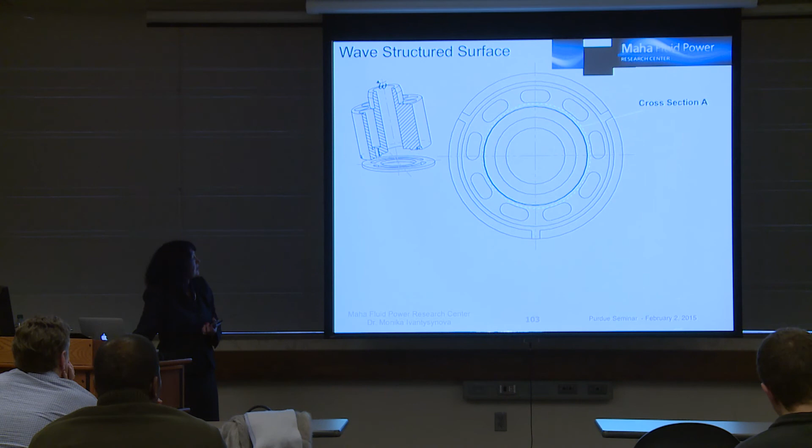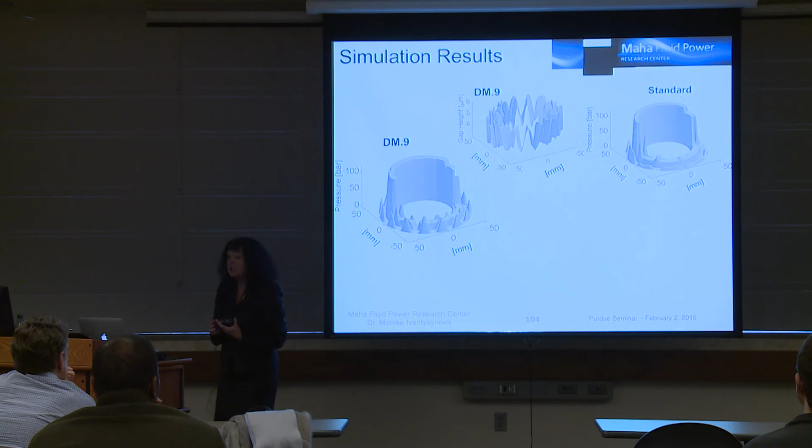On one of these surfaces, which are normally flat, and industry controls flatness to very, very low tolerances, we introduced a sine wave. Let me show what the sine wave does. We see the film thickness there with a sine wave on that plate of plus minus 1 micron. It generates hydrodynamic pressure buildup and increases load carrying ability of the film, and with that we were able to reduce friction or power loss by 60% in that interface.

Imagine, plus minus 1 micron. People said this cannot be done. Here you see what it does. This is the plate. In this exercise you don't see the plus minus 1 micron directly this way, but you see the film and how it differs in simulation between the flat surface and the waviness of the plate.

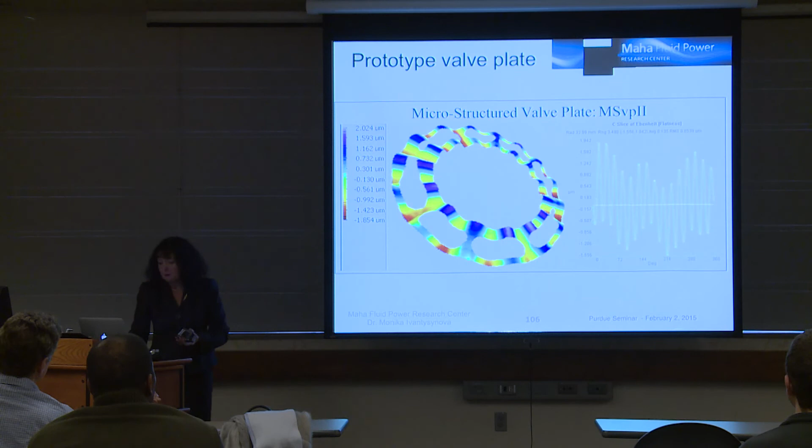We patented this and also built a prototype, which you see here. The plate was made in Germany. We measured it, and I'm very proud to report that we measured a 10% overall efficiency improvement from this little change to a surface. Manufacturing is going ahead.

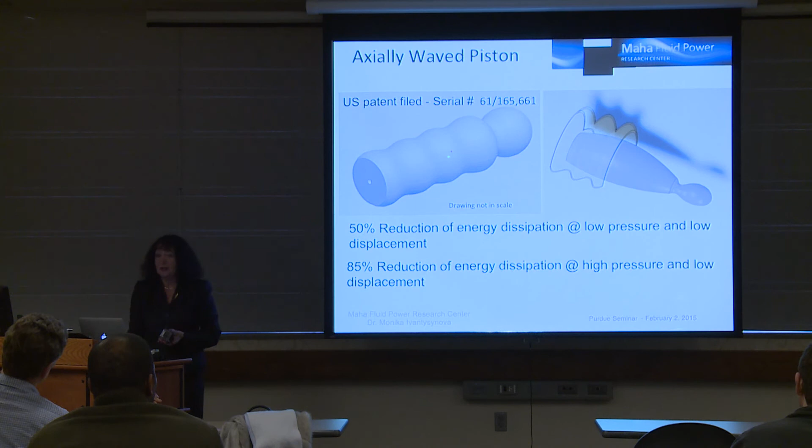There are now a lot of technologies available to realize such designs. So now we are working on waved pistons, and we are even getting crazier. We want to introduce also waviness of the cylinder. We had a company visiting us, and they told us it would not be a problem to make such a cylinder. And you see results: 50 up to 85% reduction in energy dissipation by these changes.

Now let me go on, because I want to be in time. This next part is to share with you my future plans. So what do we want, where do we want to go? Digital prototyping, I think that's the future.

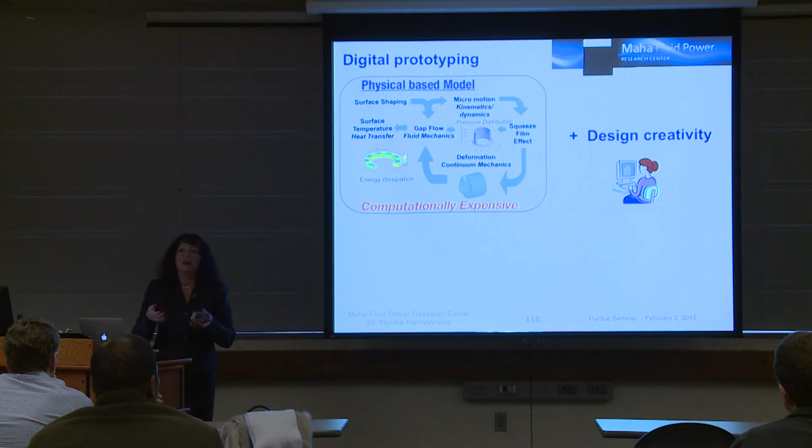We want to demonstrate to industry that they can design pumps and motors with much less money invested, and with much more ideas used, because we would design on the computer and have the analysis done on the computer before making hardware. That will reduce costs and allow us to use new ideas: surface shaping, new material combinations, new manufacturing technologies. We are planning to demonstrate this with our own Maha pump. We are currently designing it, and we want to manufacture it and demonstrate that this can work.

Another thing I want to announce: we are currently working on the Maha hydraulic hybrid. This is the car we are currently modifying, hopefully to run in the summer with a hydraulic hybrid - the new, splendid one, which Mike is the author of. We are proud that industry is interested. Most of the components which will go in that vehicle we are getting donated, and I hope we can demonstrate that a hydraulic hybrid car is capable of being designed and will drive nicely.

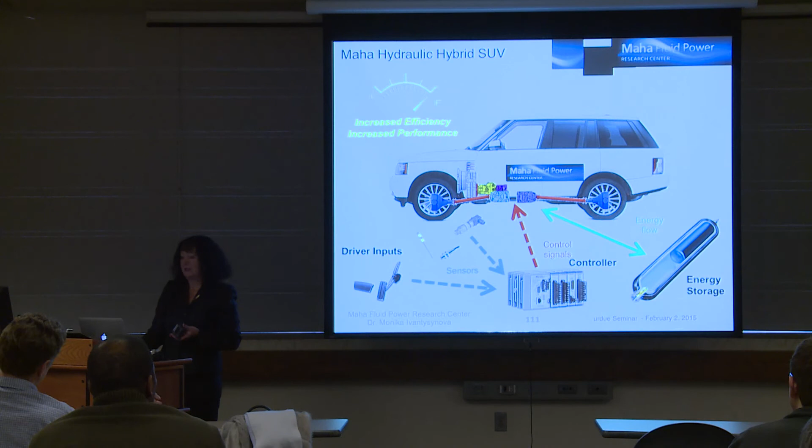So there are also some big dreams and challenges. I tried two years ago to set up an STC, a Science and Technology Center for Water Hydraulics, and I haven't completely given up this idea. We are working on water hydraulics, and I believe this is one of the technologies which should enter the 21st century, because we have only roughly 110 years of history of oil hydraulics. The Bramah press worked with water. So if we combine all our computer knowledge with other new technologies around us, we might make this challenge and my dream reality, and use water as fluid in fluid power systems under high pressure.

That's the challenge. And another idea: I would like to see displacement controlled actuation as the choice for efficient and powerful actuators and robots for this century.